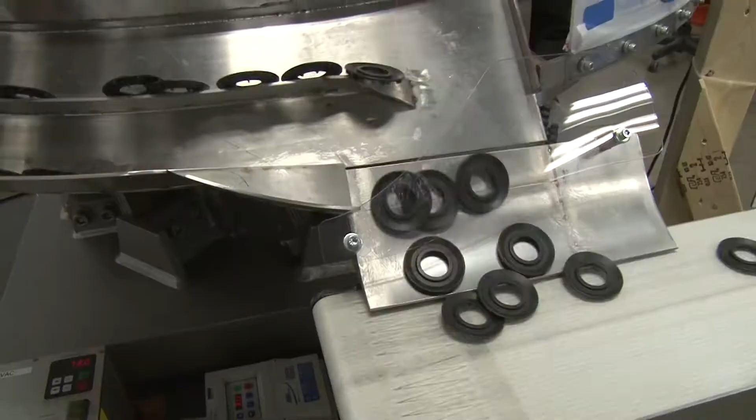Fortville Feeders is the premier parts handling and feeding system in North America. Fortville Feeders was launched by Michael Krause in 1979, and he started this business in his own garage. We now operate in a 60,000 square foot facility dedicated strictly to parts feeding excellence.

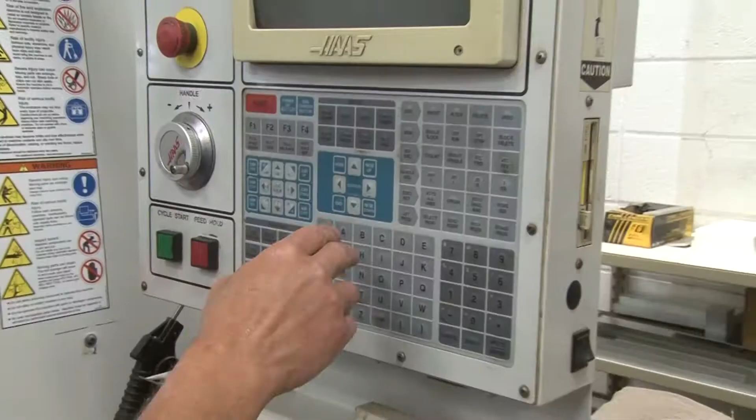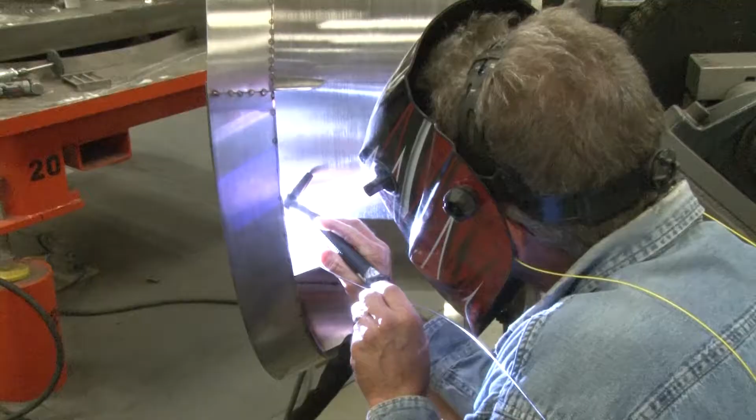Our engineers are expert designers who combine years of parts handling knowledge with the latest technologies. Our toolers are very high-skilled craftsmen specializing in parts feeding systems. We have our own in-house machining and milling capabilities, including CNC milling, EDM drilling, and waterjet direct-to-print cutting. Fortville Feeders is the engineered solution.

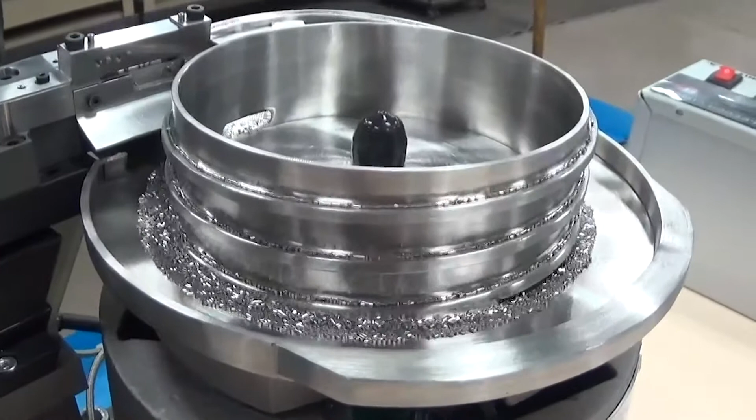There was a time where I just kept picking up the phone and people were coming to me stating the fact that they felt as if we were a little bit more established than some of our competition in regards to vibratory feed systems. And they said, and I quote, 'You are a little bit more of an engineered type solution.' And I kept getting that phone call. At that point, we decided to change our tagline to the engineered solution.

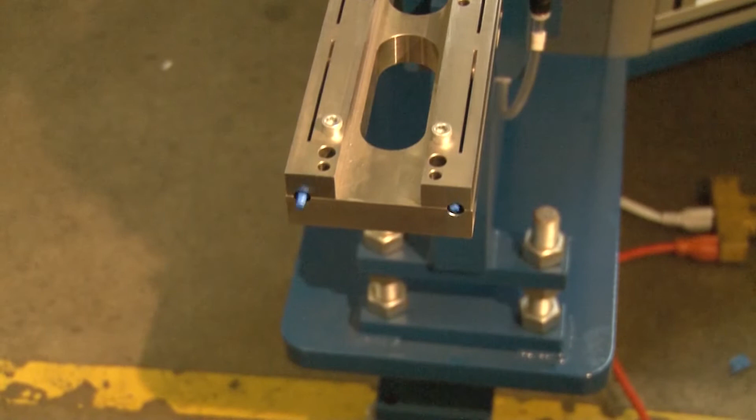We were the first in our industry to purchase a licensed seat on AutoCAD engineering. We also are the first vibratory feeder company to purchase a water jet, and we have an EDM machine. So we really have kind of led the industry as far as our technology is concerned for vibratory feed systems and vibratory feeder companies. We also have a crew of just under 70 employees and a complete staff of mechanical engineers as well as electrical engineers.

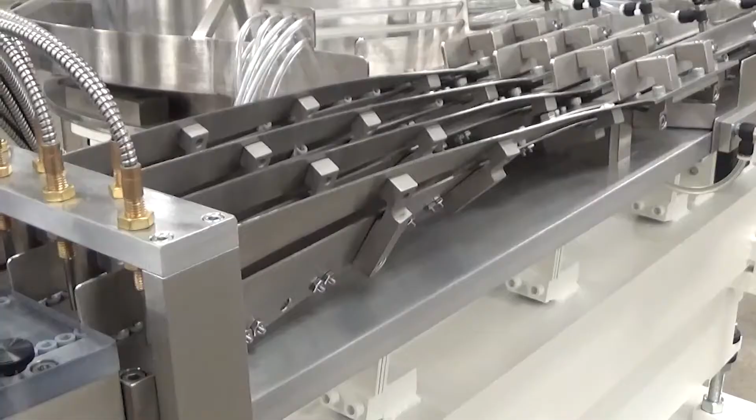The most important part of the Fortville Feeder system is the handoff from the discharge end of our track to you, the customer. So the parts feeding is just fine for us, but it's that transition from us to you that's most critical. And our competition would often quote a vibratory feeder bowl, bulk handling, tracking, dropping parts off the end of the track into a box.

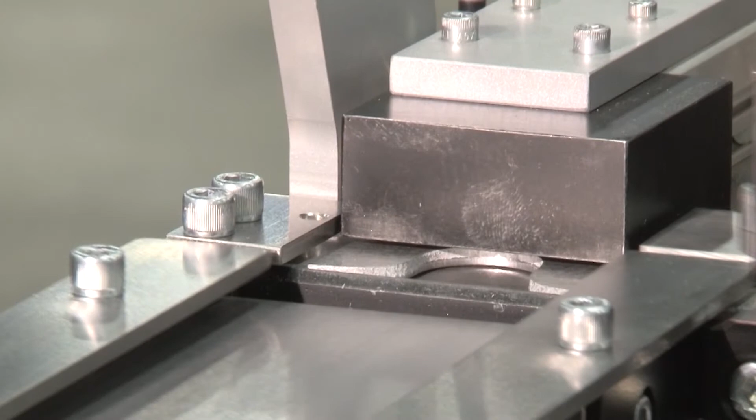Not much to it. Our key importance on our feed system is what happens at the end of that track. What is the handshake between Fortville Feeders and you, the customer? So what is it that takes place in that transition? Our goal is to take product from bulk and transition it and hand it off and isolate it so that the customer can do whatever process they need to do.